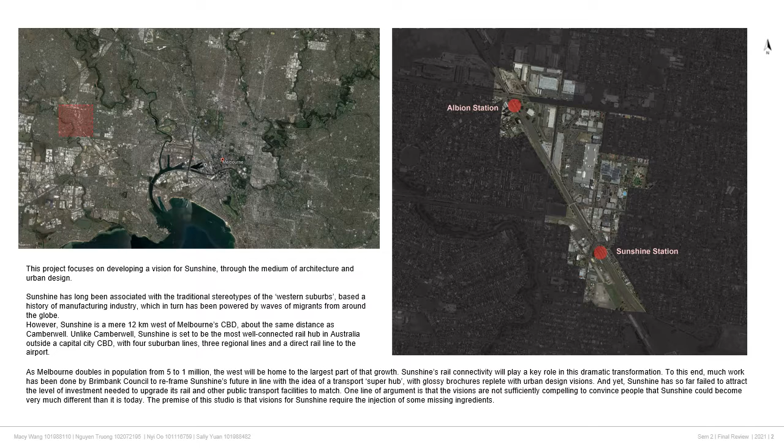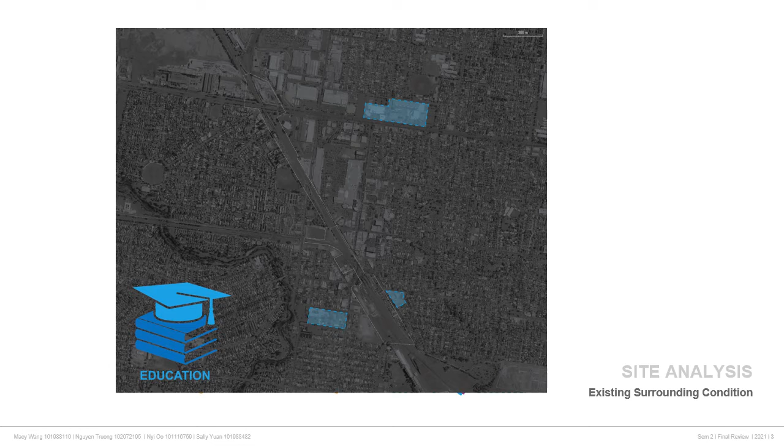Our vision research focuses on these particular topics, which include capital of Melbourne's West, as Sunshine is the fastest growing region in Australia, offering different opportunities and benefits; Proudly Sunshine, as it contains a diverse and multicultural community in the area; and Future Green City, focusing on a sustainable environment for future generations.

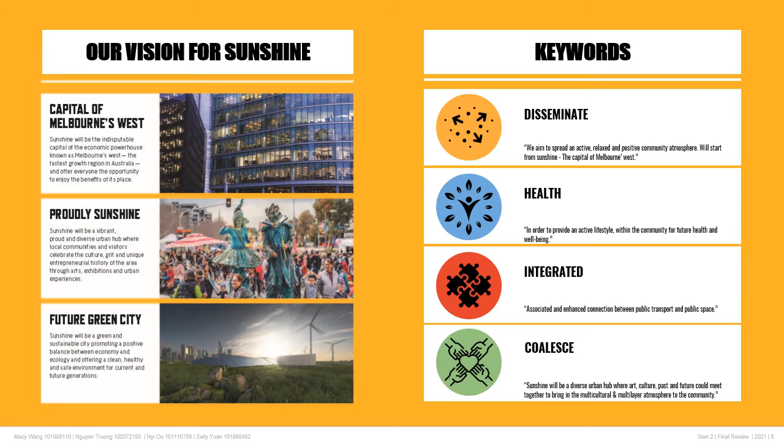These are the keywords we chose. They include disseminate, health, integrated, and coalesce.

Our proposal 1 is about transportation development. First, elevate the existing railway. It could increase the connection for pedestrians and active transport, as well as for vehicles.

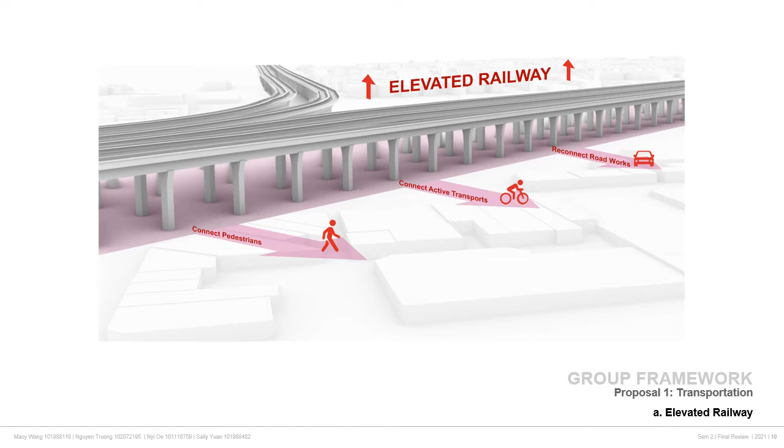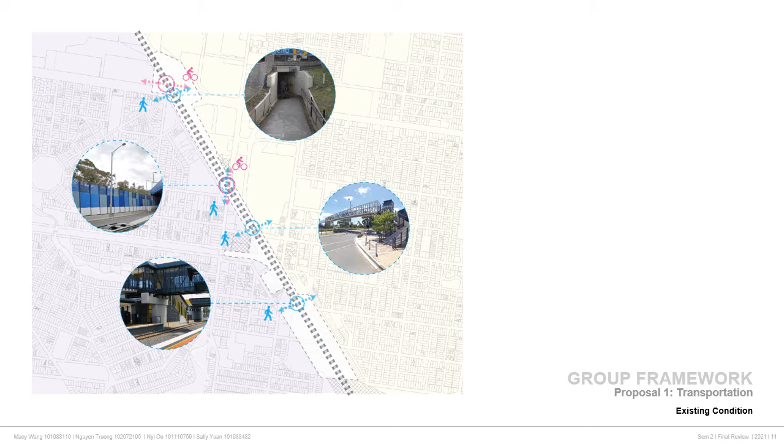Once the underground railway is elevated, some roadworks could be reconnected. This existing condition diagram shows that the railway divides the area into 2 parts, residential and commercial, and with its 4 crossing points, proves that this area has poor connection with its rail corridor underground.

Elevated railway costs less, is good for other on-the-ground transport systems, as well as better connectivity for walking and cycling. It provides better views, and the well-designed structure can make it a landmark.

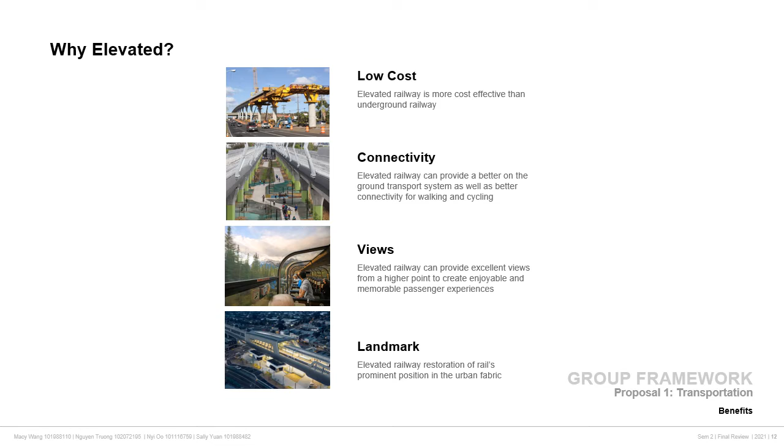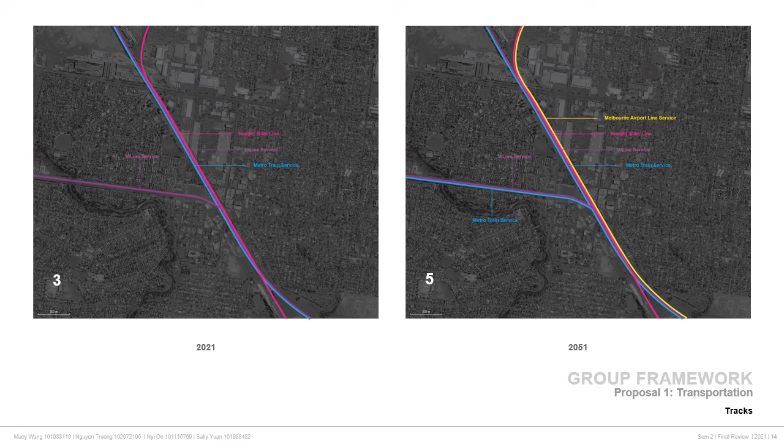The elevated railway will go through the entire study area and reach a height of 12.5 meters. The rail service developed in 30 years will make it from 3 tracks to 5, with 1 Melbourne Airport line service and 1 extra metro train service.

Metro will have a service connecting to Melton. V/Line will extend to Avalon and Wyndham Vale. There will be a new Melbourne Airport line service, and an existing track for freight, but just passing through Sunshine, not stopping.

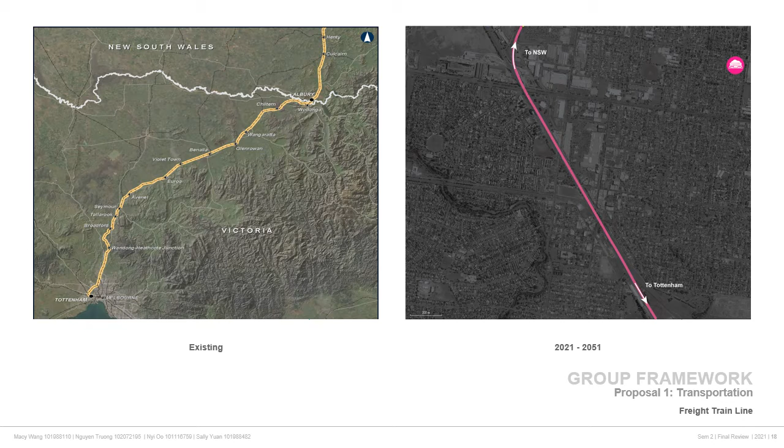The other transportation to be developed is bus service, with the existing bus route and existing Sunshine Station and its bus stop, and then our new Sunshine Station location, with its bus stop right next to it. So we selected 3 bus routes as an example of changing bus stops.

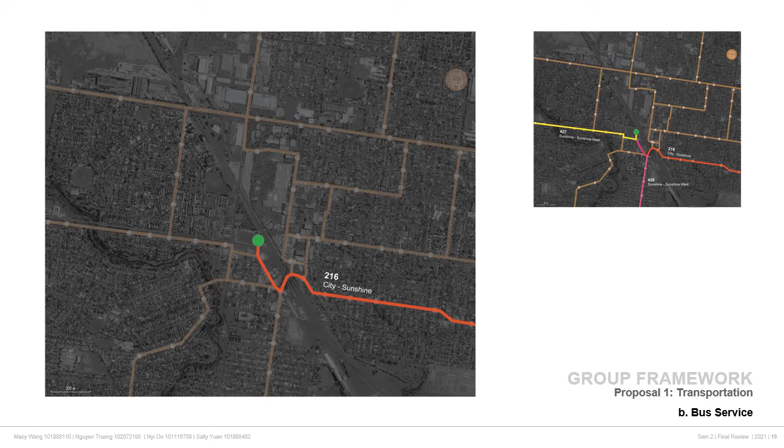Let's move on to proposal 2, roadworks. The diagram shows our proposed roadwork, called Wominjeka Road. It can provide more convenience for surrounding residents and also bring a sensory experience to visitors.

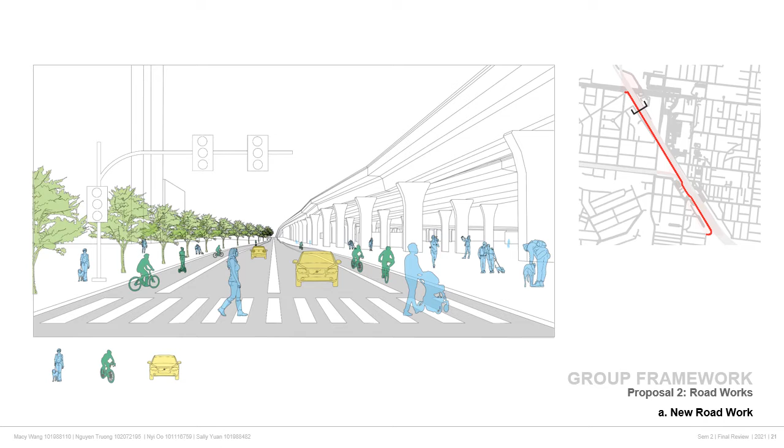They can choose 4 different ways to get to our site: walking, cycling, driving, and taking the train. During cycling and driving, they will see our unique architecture, a different experience compared to taking the train.

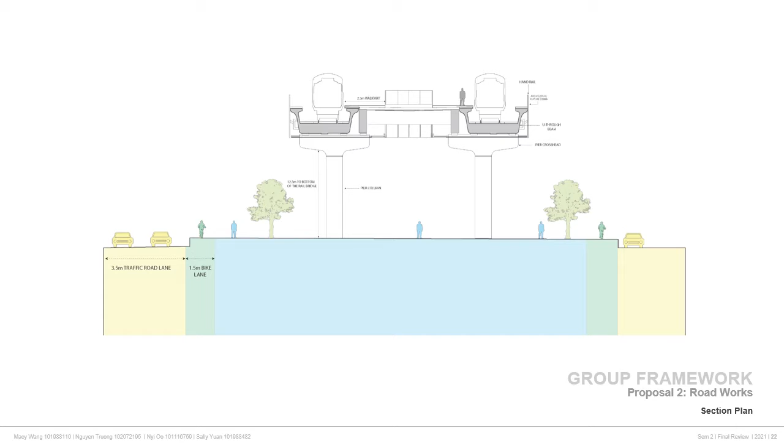The pedestrian path is designed below the elevated railway, with cycling and traffic road lanes on both sides. We encourage people to choose bikes during short-term trips.

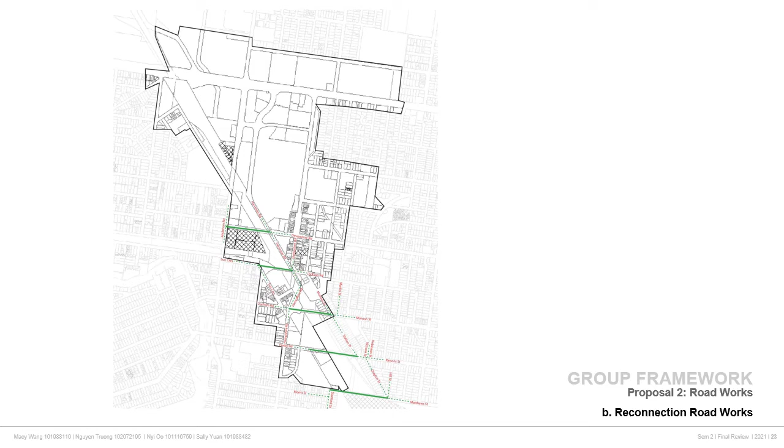We chose to reconnect some roads for vehicles to make the roads on the left and right side of our site more effective and convenient.

According to the Sunshine Town Center structure plan, the yellow hatch lines are planning roads, the red lines are our proposed Wominjeka Road, and the green lines are reconnection roads.

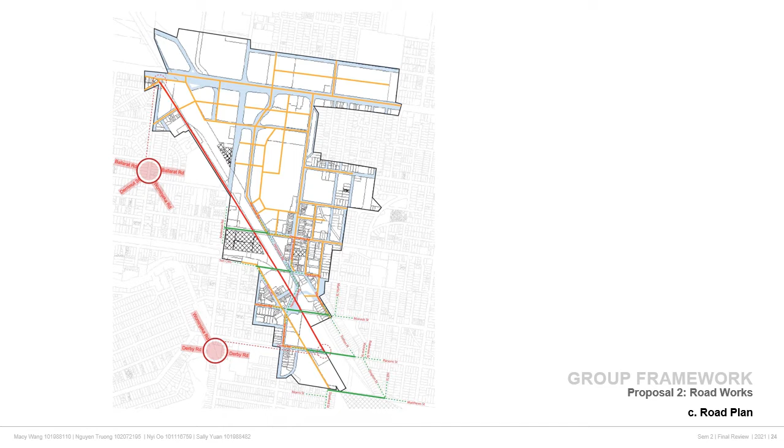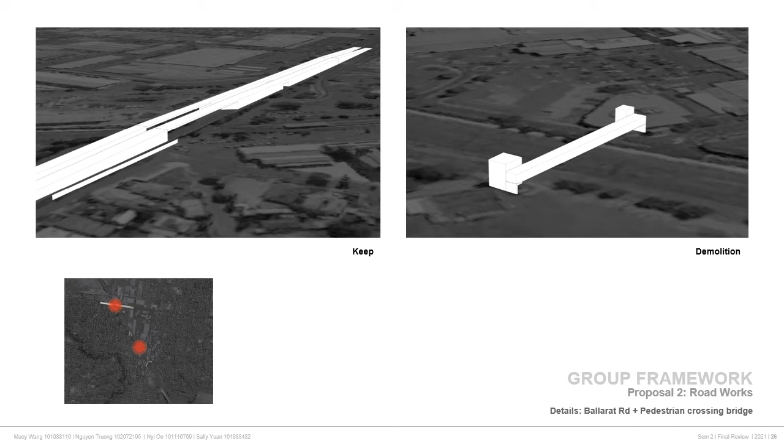There are three infrastructures in our site. We keep the overpass on Ballarat Road, demolish the crossing bridge, allow vehicles to overpass on Anderson Road, and make Hampshire Road flat.

Proposal 3 is the railway stations. As a new proposed railway station, we want to create rail services as the main transportation in the area, which is why we decided to have 4 main stations.

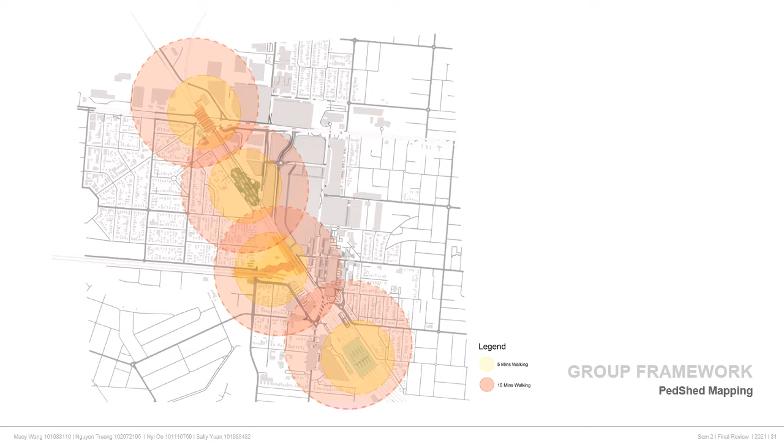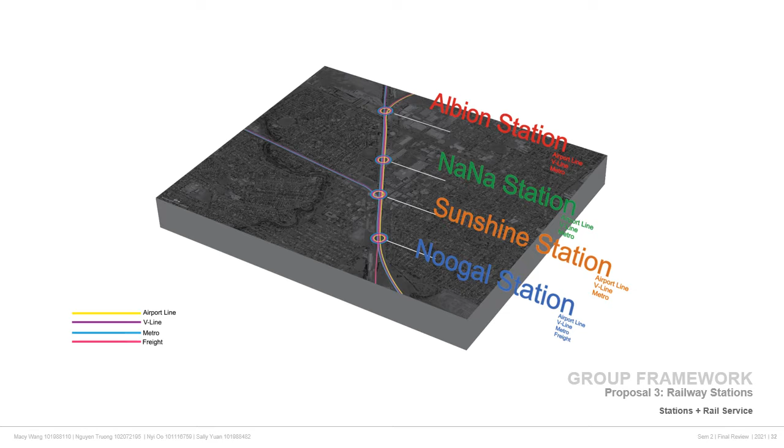Our aim and vision is to have zero carbon in our areas and maximize the utilities for public transport to minimize driving by car within our group framework. Our four main stations proposed are Albion, Nana, Sunshine, and Noogal, which will cover all the rail services in our group framework.

Proposal 4 is precinct. For precinct, we decided to allocate four main precincts: education, art and cultural, economics, and sport and recreational, into our station program to activate Sunshine.

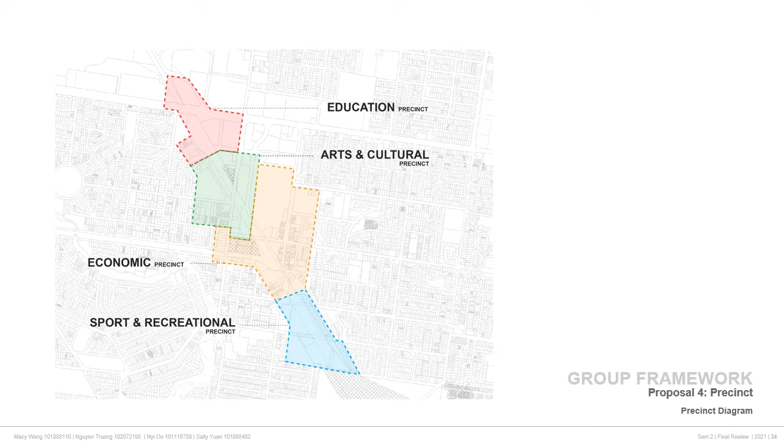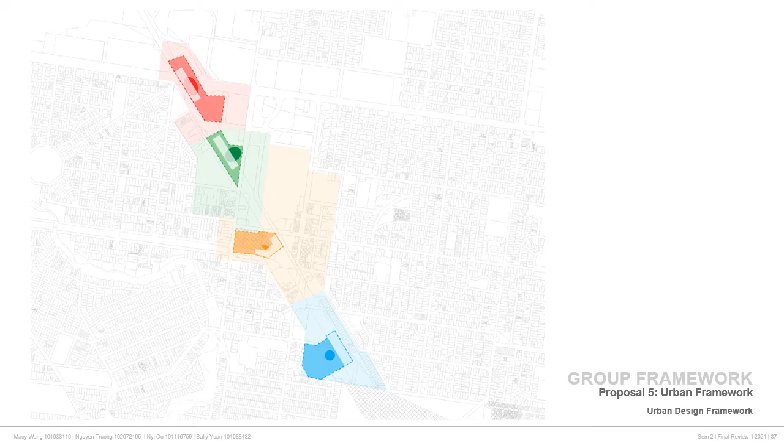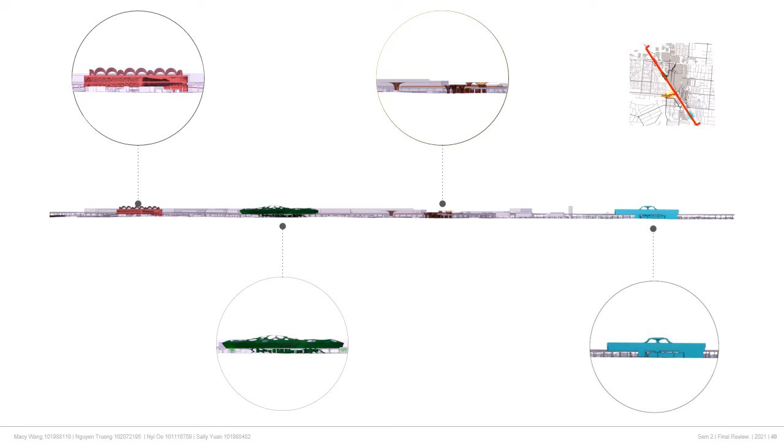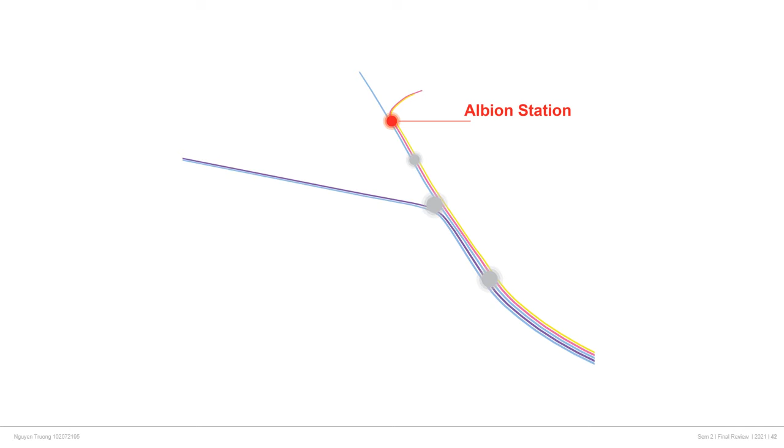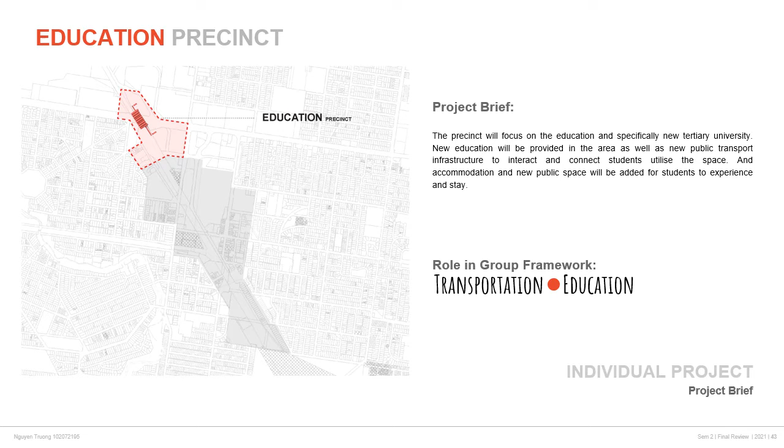For our individual projects, we focused on the Albion station areas. For the project brief, the precinct will focus on education, specifically the new tertiary university. The new education facility will be provided in the area, as well as new public transport infrastructure to interact and connect students to utilize the space.

Accommodations and new public space will be added for students to experience and stay. This page will show key elements and programs listed to be included in the precinct, along with a key and a visions collage to illustrate it.

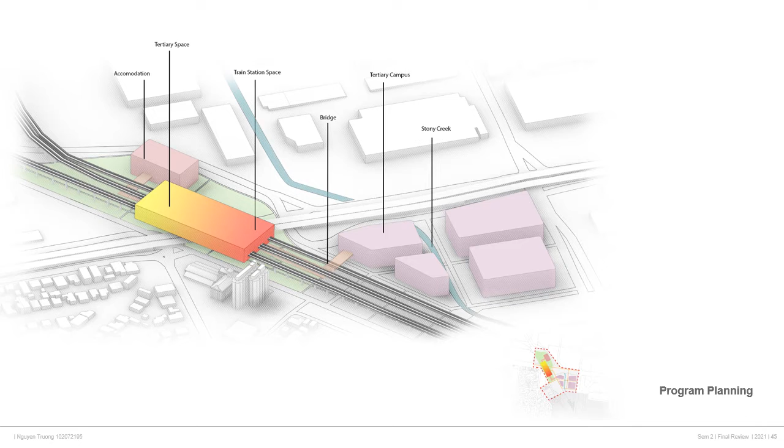For the program planning, the station space in the tertiary areas will be placed at the central of Ballarat Road, which becomes a link between accommodation and the tertiary campus. Also, the elevated space opens up more green areas and public activities below.

This is a site plan to show an overview of the program. For the ground floor, there's a multiple entrance so people can easily access both the station and tertiary areas, with a pathway in between connecting the two programs together.

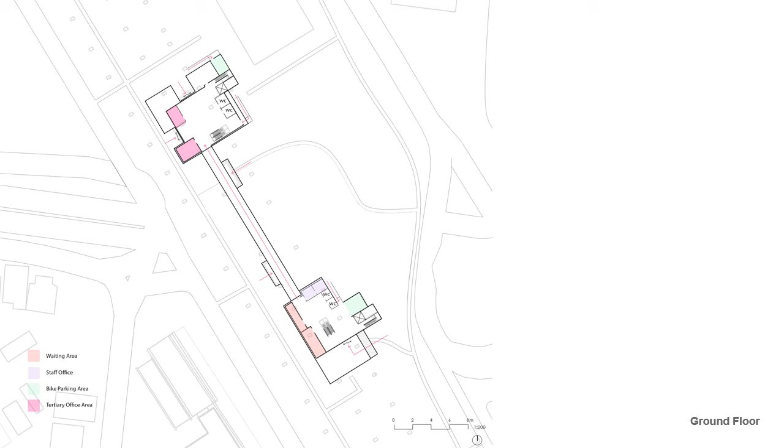Each program will also have bike storage for cyclists.

For level 1, the station areas and tertiary space are connected with a bridge for easy access. The bridge also links into accommodations and campus areas, so students can access both programs without any trouble.

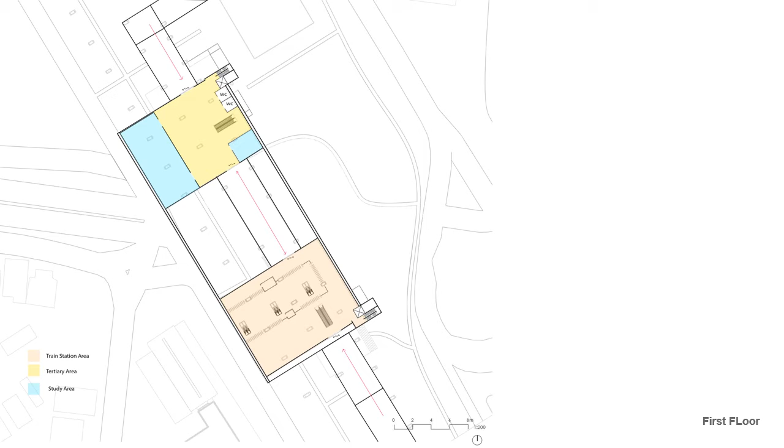For the roof inspiration, the form was inspired by the Darling Mill Heritage in Albion, using a round pipe turned into a roof shape, then modified with a bigger radius to allow natural sunlight into the buildings, and slightly angled to collect water for purposes.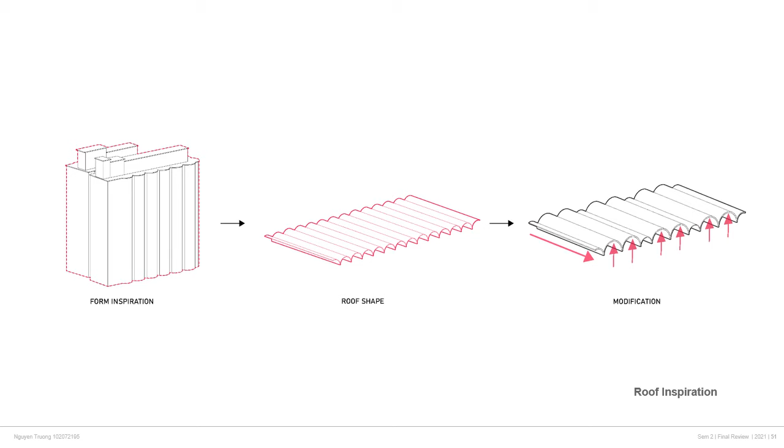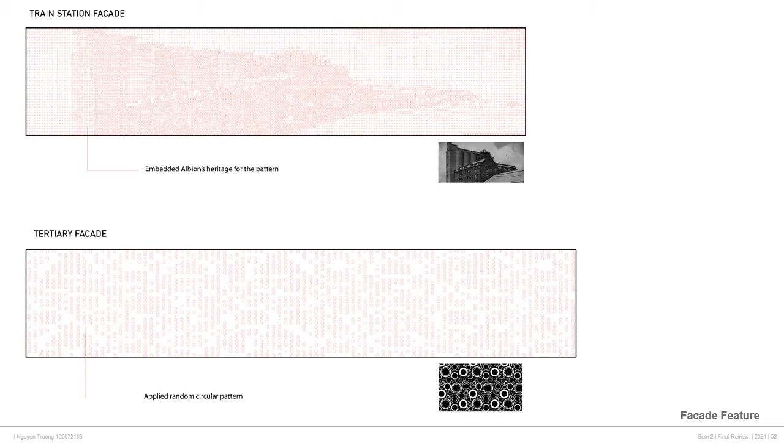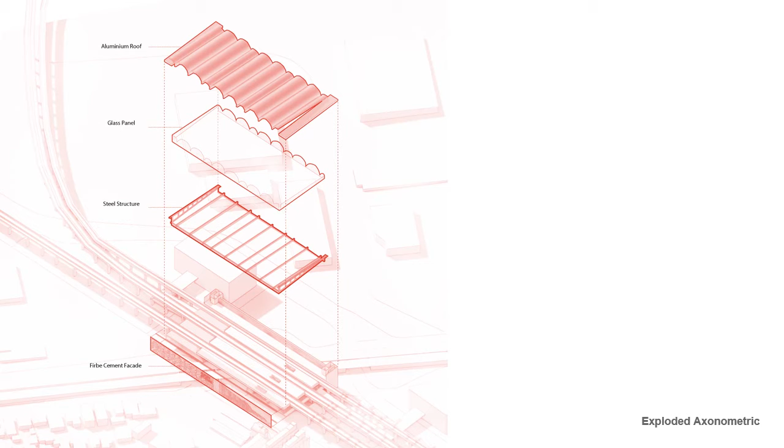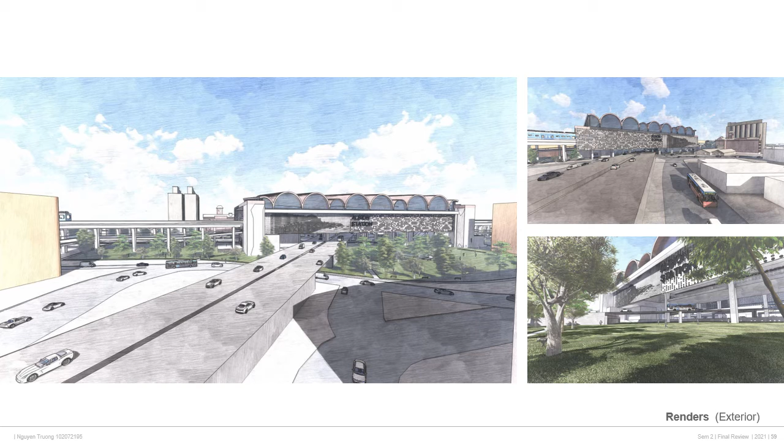A section perspective shows the circulation in the buildings, followed by a short section, and renders for the exteriors and interiors.

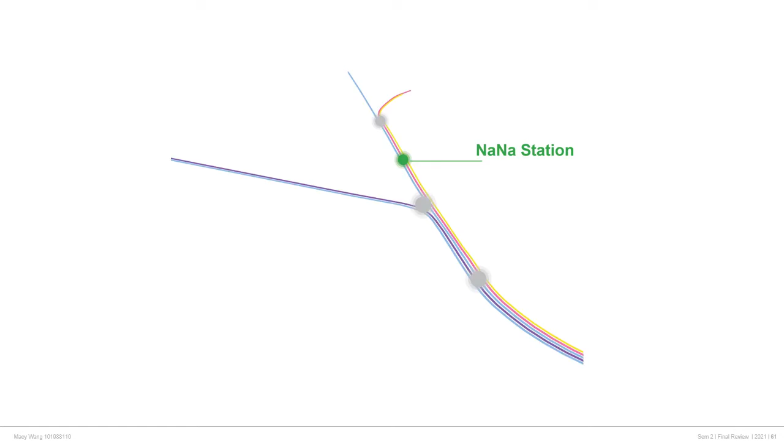NaNa Station. NaNa means 'sea' in Wurundjeri language, and we hope this area can give people a great visual sensory experience. For my project brief, this multicultural-friendly project will be developed in the Arts and Cultural Precinct to provide a place for multicultural communication and appreciation.

As we're planning to use the rail service as our main transportation infrastructure to serve and activate Sunshine, NaNa Station will be built between Albion Station and Sunshine Station to increase the connection and convenience throughout the whole area.

In this precinct, art and culture are used as media to fill and connect this area. NaNa Art Center will provide different cultural backgrounds, artwork, exhibitions, and activity events for the community, as well as forming part of the capital of Melbourne's West.

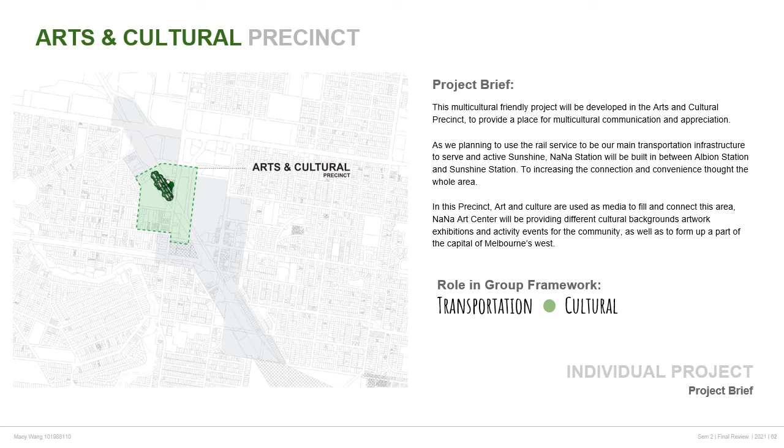And as the role in group framework are transportation and culture. My vision collage and key elements will be included in this precinct. Program planning: land use will be only focused on the green hatch area, and I am planning to make 2 programs, a station and art center, somehow interrelated.

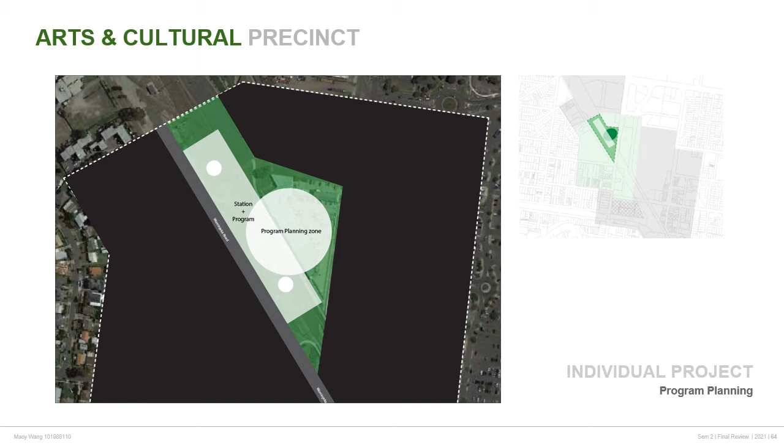Then I started to do some form-finding inspiration research. The Aboriginal dot paintings did inspire me. I found the shape, layout, and connection really attractive. Then I got my design done.

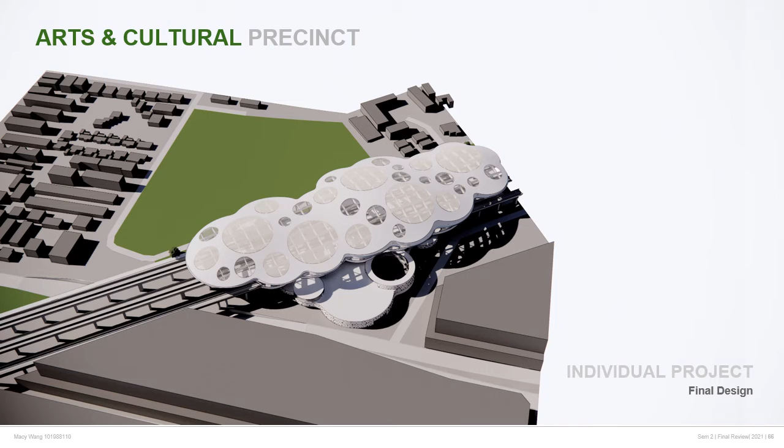The rail station, Nana Station, with the floor plans, platform levels, and roof.

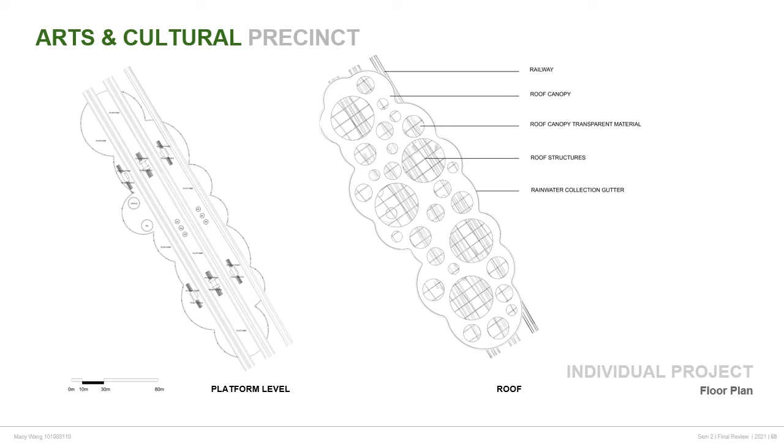About rail service, Nana Station includes 3 tracks. The pink one is for freight passing through, yellow is the Melbourne Airport line, and the Metro and V Line are sharing 1 track to Sunbury and Bendigo.

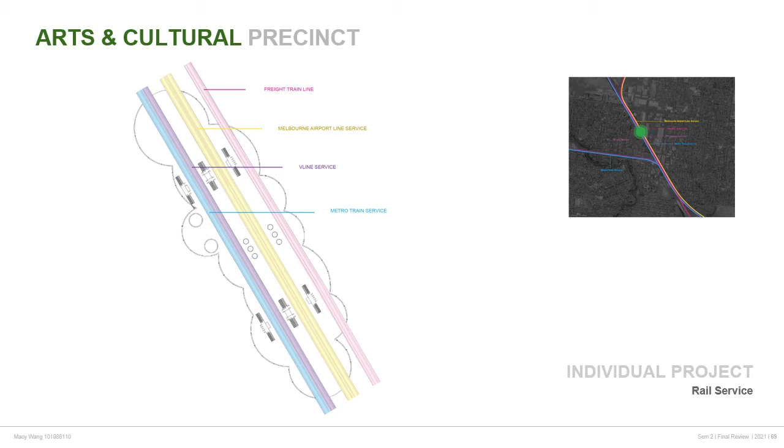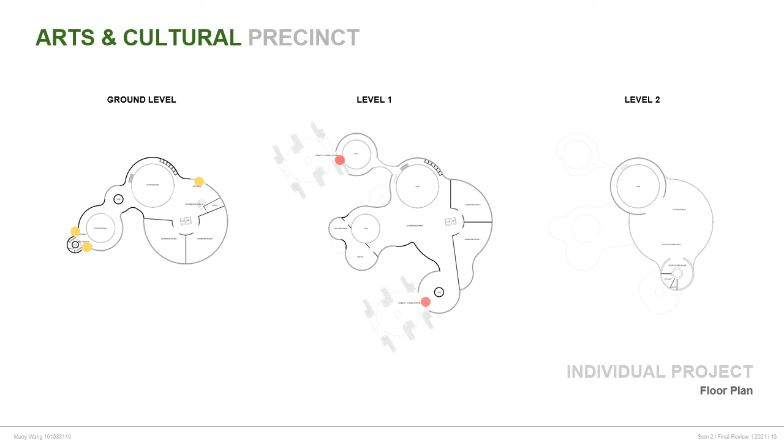And NaNa Art Center. The Art Center has 3 levels, with 3 main entrances on ground level, which is the yellow dot, and 2 entrances on level 1, both connecting to the station via a crossing lift, shown as red dots. This is the entrance connecting to the station on level 1.

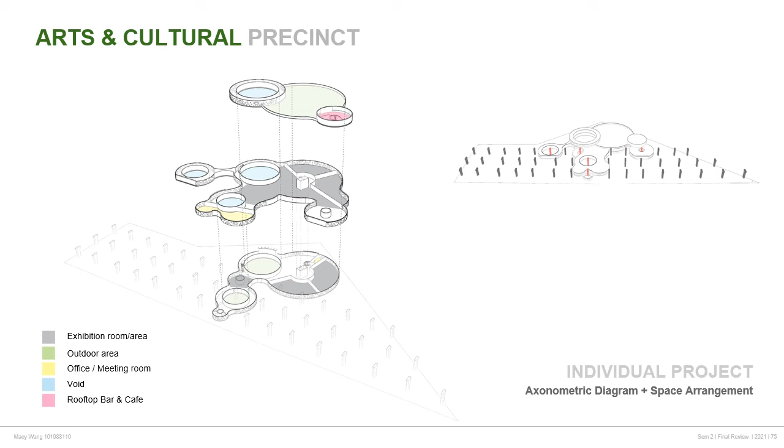It has 4 main exhibition rooms, some outdoor area, office meeting room, and a rooftop bar and cafe. Speaking of the arrangement, part of the art center is located under the elevated railway, so it needs a bit of cooperation with the structure columns. Most of the void is because of the columns.

There are a few activities that can happen in the art center. Melbourne is such a multicultural, diverse city, especially western suburbs like Sunshine. Some people live in the area with not even 1% population ratio. They rarely have the chance to exhibit or appreciate their own culture's artworks. NaNa Art Center is a place that welcomes all multicultural artists to exhibit artworks, to communicate and express to others.

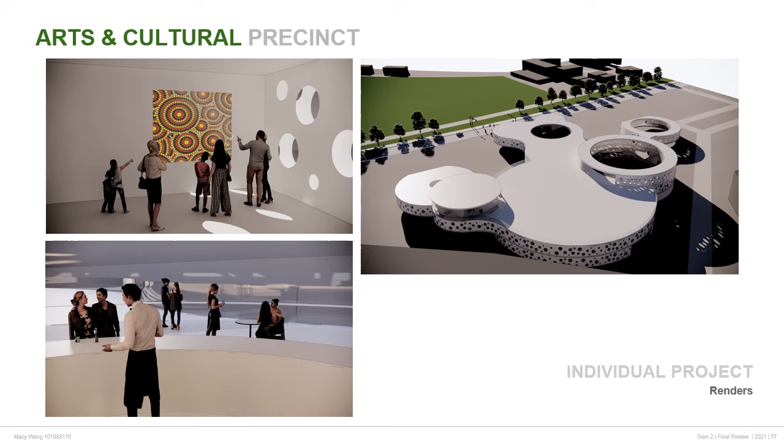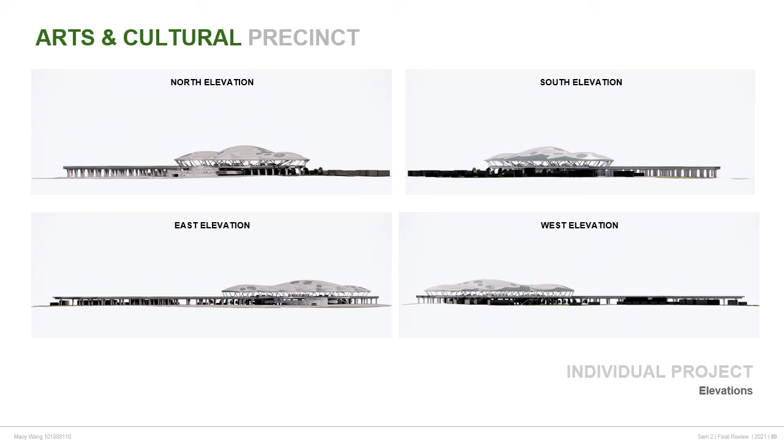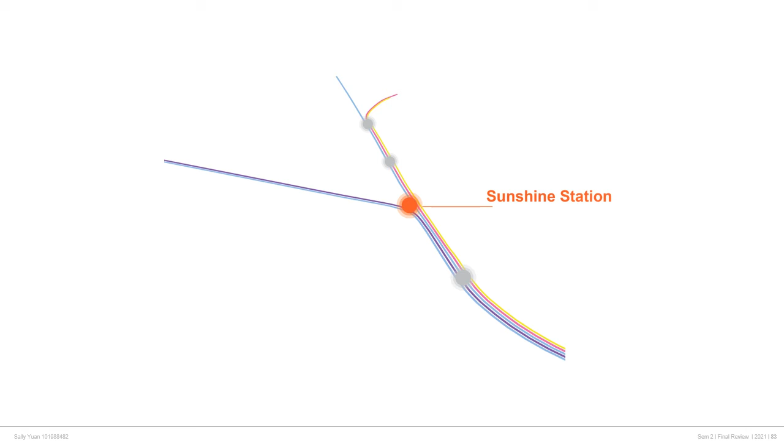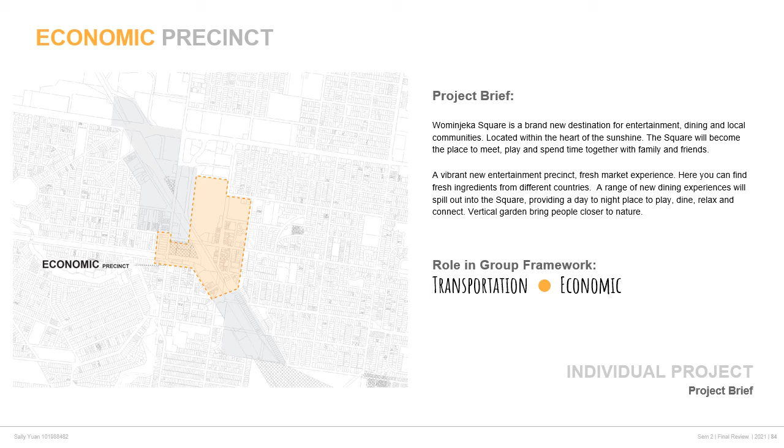The yellow hatch area is my precinct. I'm into transportation and economics. The project, which is Wominjeka Square, is a brand new destination for entertainment, dining, and local communities. Located within the heart of Sunshine, the square will become the place to meet, play, and spend time together with family and friends. My design project includes Sunshine Railway Station and a market.

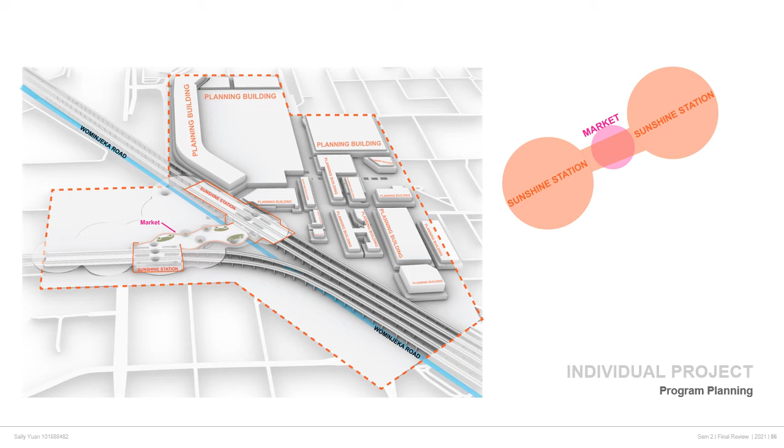As we mentioned, the Sunshine Station moved to a new location, which has 2 separate platforms. I used a bridge to connect them, according to the Sunshine Town Center structure plan, and I decided to keep the right side area, which has planned buildings. The market is under the Sunshine Station, on Wominjeka Road, which is our group's proposed new road.

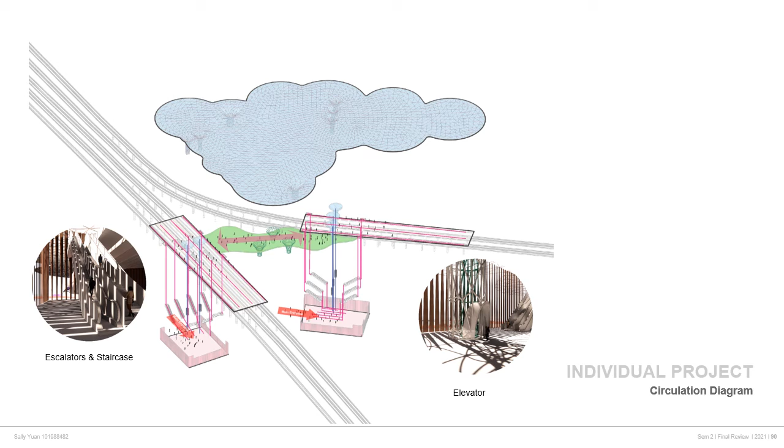To meet the design standard of railway stations, platforms cannot be built in curved places and must be a minimum of 215 meters long, so the Sunshine Station is divided into two areas. Each area has an independent circulation system—stairs, escalators, and lifts—provided for passengers carrying heavy luggage or disabled passengers, and the lifts are connected to the canopy's column.

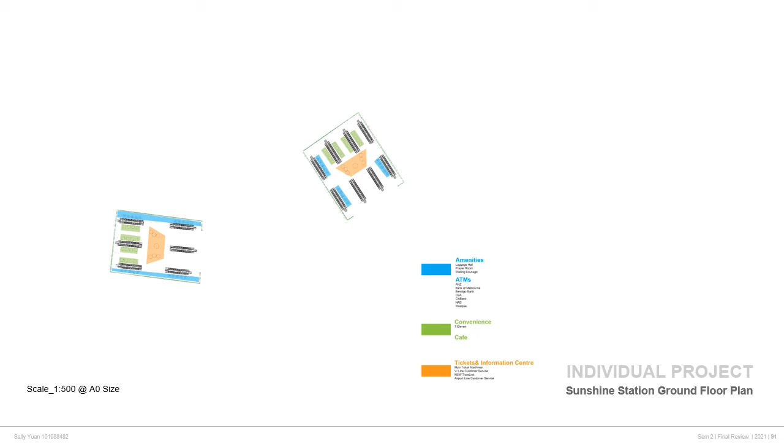This is the station's ground floor, featuring a cafe, ATM machines, and 7-Elevens to provide services to passengers. This is the first floor plan. The platform on the left side serves the metro and V-Line, and on the right side serves airport lines, V-Line, metro, and freight.

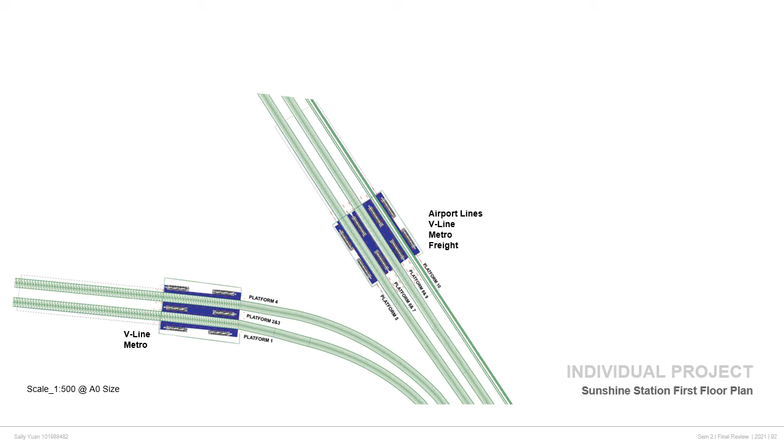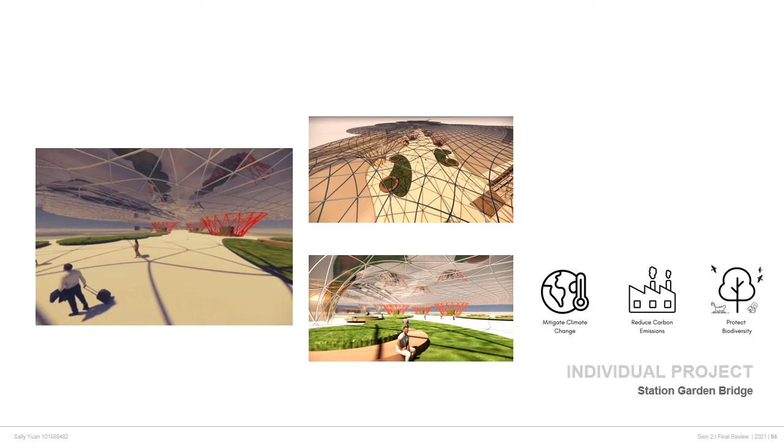Consider how to connect the two stations while providing a great passenger experience. The Garden Bridge can provide passengers with a different exchange experience. When passengers come to Sunshine by V-Line from other cities, they will be attracted by the Garden Bridge, forgetting the tiredness and stress caused by their long trip.

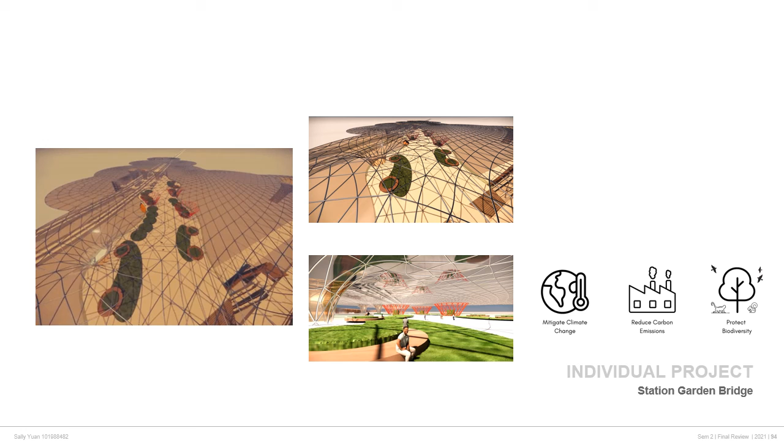There is also a vertical display of tropical flowering, together with mass flowering and a colored landscape, providing color, fragrance, and texture within the Garden Bridge. The marketplace became an extension of the nature landscape.

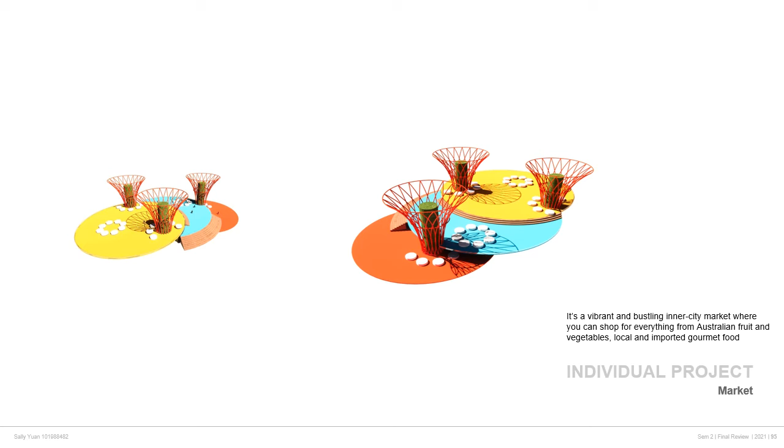The canopy filters the sunlight to allow people to enjoy the healthy and well-being benefits of shopping outdoors, and the market will generate a powerful sense of community, integrating private and public demands.

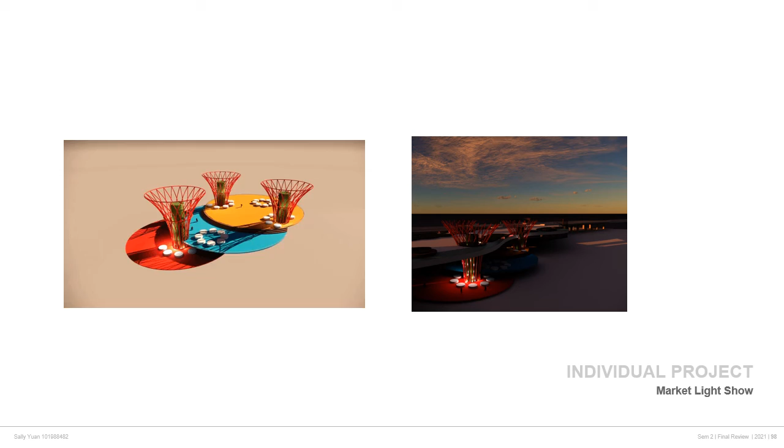There are lightings on the vertical panels during the night, which can guide the way. Here are some renders for the Sunshine Station and the gardens.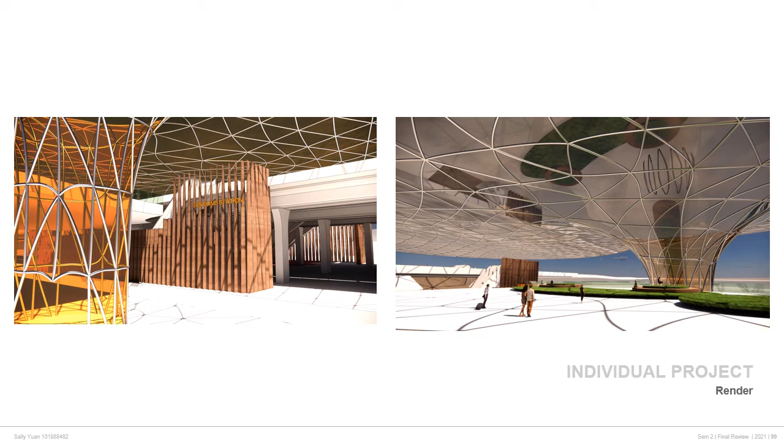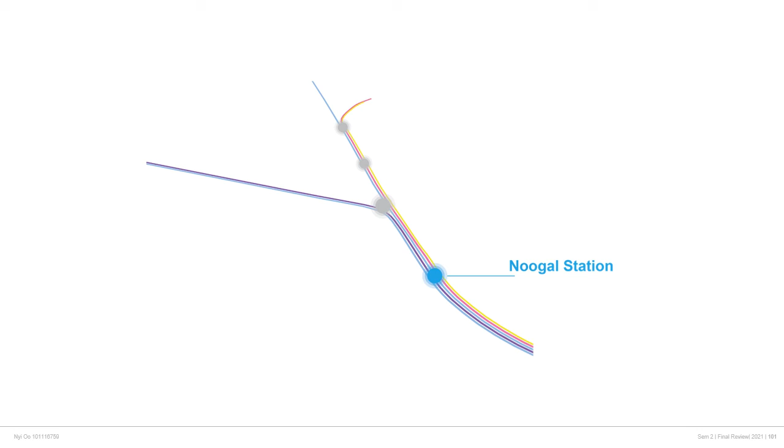Finally, moving on to the last individual project, we have Noogal Station, which translates to 'belong' in the Wurundjeri language. This area will focus on lifestyle combined with transportation. This territory focuses on sports and recreational infrastructure combined with public spaces and retailing for food, drinks, and entertainment for both indoor and outdoor users. This also includes active transport and public infrastructure. Its ideal sporting purposes will engage the community of residents, families, and students to connect with the area.

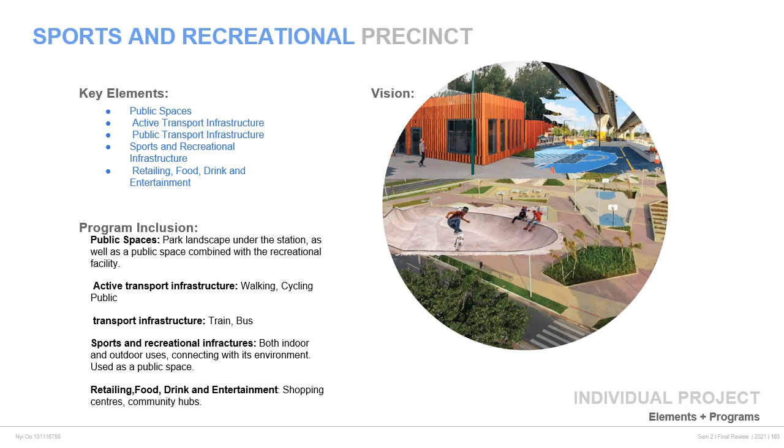The program's spatial framework focuses on the combination of recreational facility, public space, and the new station. The facility and public space will be constructed on public land near residential areas, hosting multiple sporting activities. The new station itself will be located next to the facility for easy access, also containing a street-style park below it, hosting playgrounds and recreational uses.

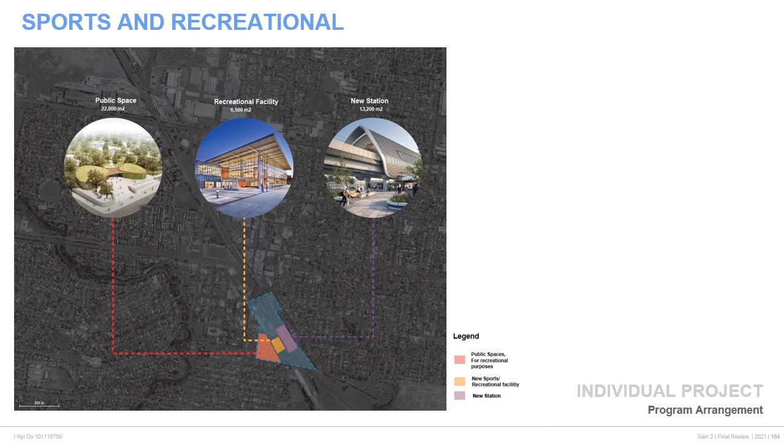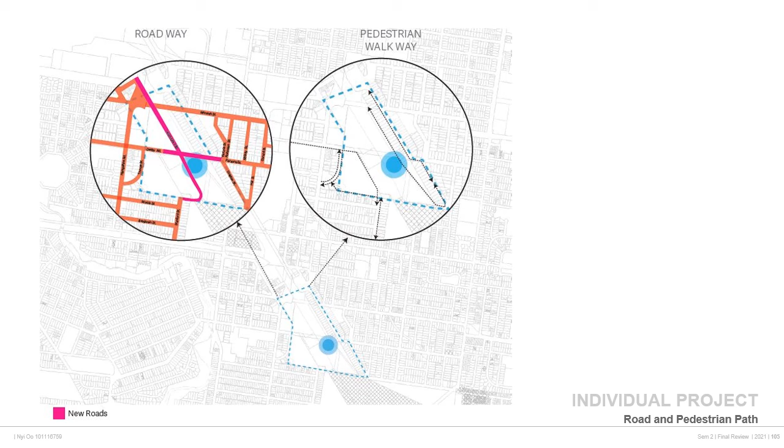The highlighted roads in pink are the new roads with reconnection. This allowed me to think about certain parking areas, while the other diagram shows the pedestrian walkway. This diagram showcases the open landscape planning, which will be placed near the program and station, connecting with one another.

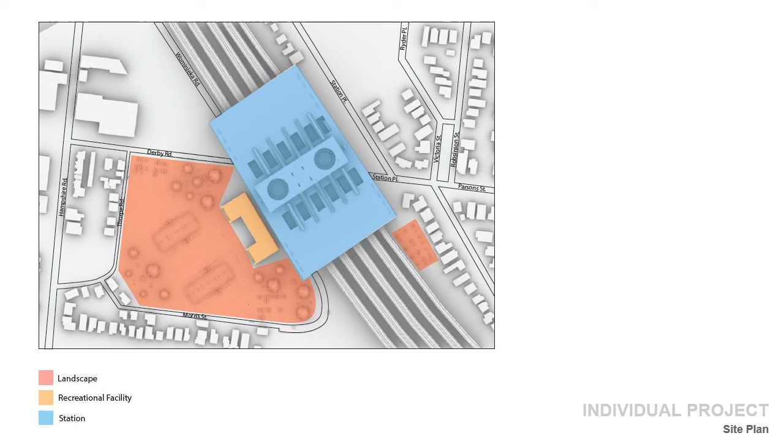This is the site plan, showing the programs and activities that occur in the area, such as the Noogal Station, which also contains a vegetation-styled park on top of it, the recreational facility itself, as well as activities such as tennis courts, ovals, picnics and park areas, and also pedestrian and cycling paths.

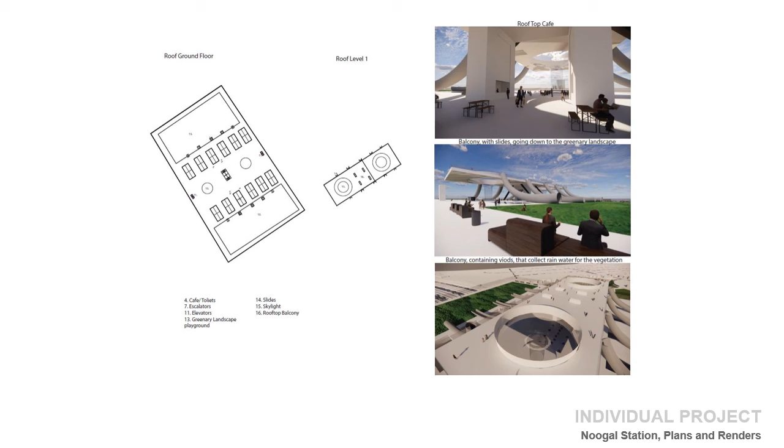Since Noogal Station hosts a sixth platform, it's a large area, so the idea of adding a park theme with slides and natural vegetation landscape was applied as a way of more interaction with the station, bringing families and friends to view its surroundings and enjoy the area. Due to the area also having a lot of greenery, balcony voids have been created allowing for the collection of rainwater.

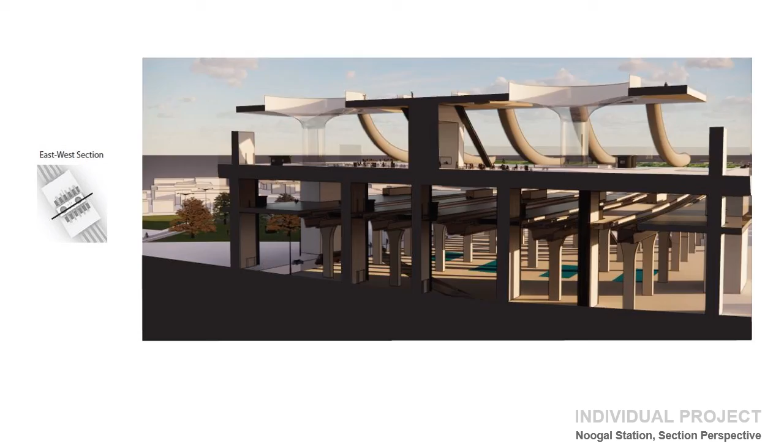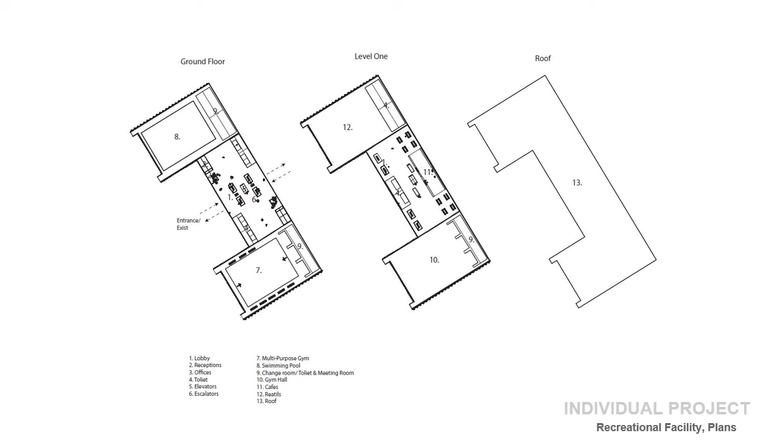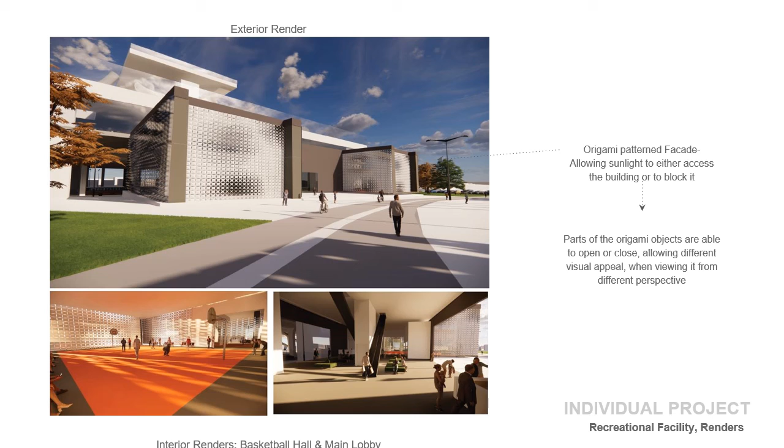Moving on to the program, which contains the recreational facility. Here are the plans—this area hosts many sporting activities and also contains retail shops. Here are the exterior and interior renders of the facility. The structure contains an origami pattern facade, allowing sunlight to come in or out of the building, and the open and closed pieces of the structure also allow different visual patterns when viewed from different perspectives.

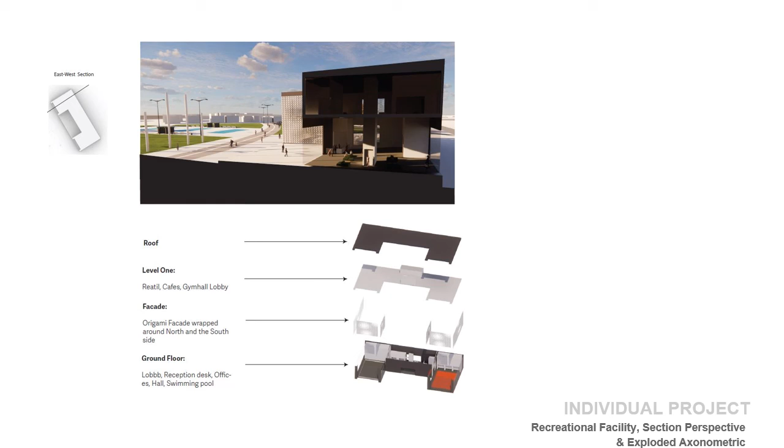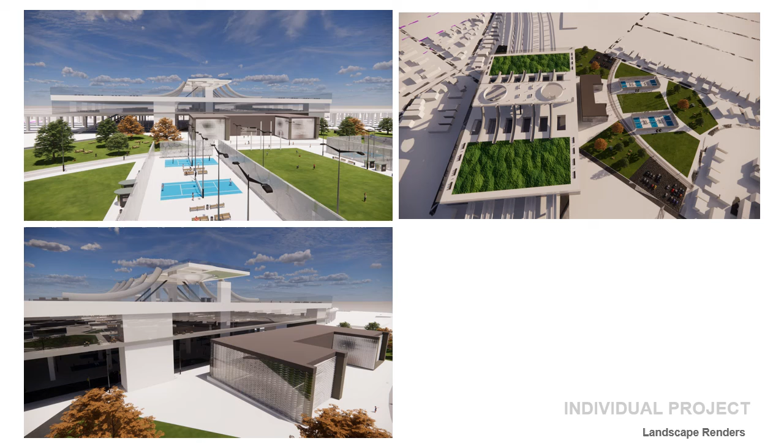To finish off, here are some renders of the station at a human's perspective view, along with some landscape renders. Thank you very much for listening.